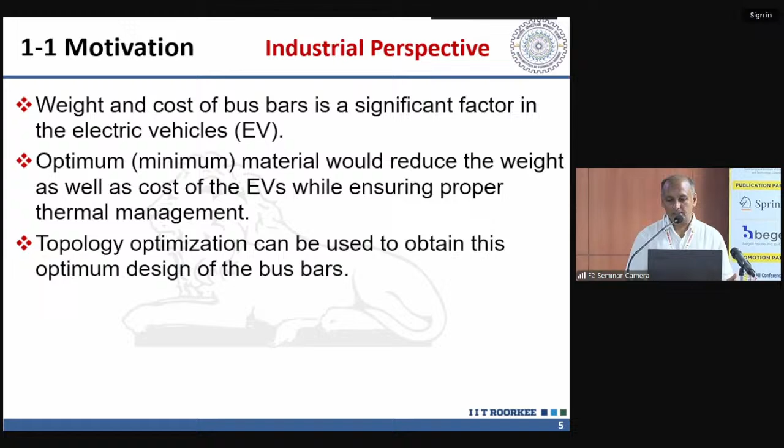So just a brief overview of what is topology optimization. It's essentially a procedure to optimize the distribution of material to achieve the best result, satisfying the physical constraints based on the physics of the problem.

This topology optimization is used in many engineering fields, though the context would be different. For instance, in the structural context, we would like a stiff and strong structural element - there the physics would be deformation. Similarly, in our context, it is thermoelectric effect. Similarly, if you've got a heat sink device, there it will be fluid flow and heat transfer. So that will be the physics involved, which will dictate our optimization process.

Topology optimization originated long back - if you go to theoretical beginnings, it originated sometime in the beginning of the 20th century. But the formal topology optimization processes became popular only after computer-aided design applications became dominant in the 1980s. Now it has been extended to a variety of applications, including structural, heat transfer, electromagnetics, and so on, with research on different optimization approaches and techniques to improve the process.

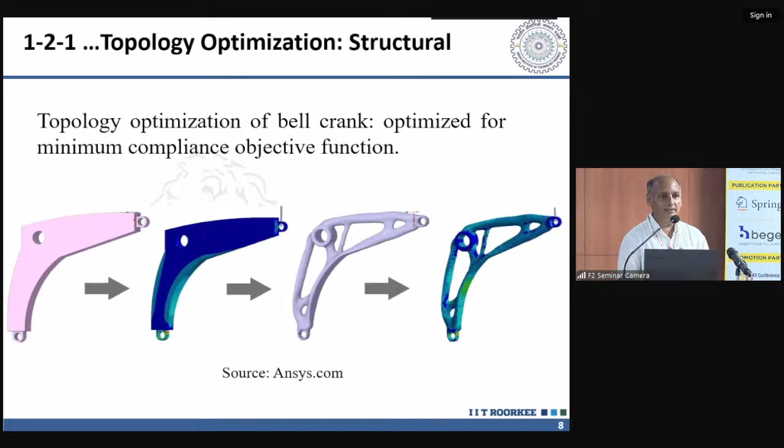So designs could vary. That's why I told you earlier that nowadays alloy wheels have very crazy designs, and they all satisfy the strength requirements. Depending on the designer and the car company, we get different designs of the wheels.

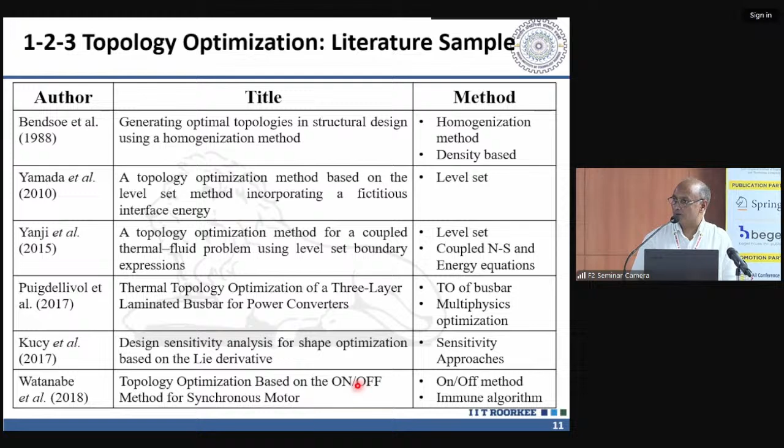They used a specific approach called Lie derivative to perform the optimization process. Other processes suggested are based on on-off methods, again for synchronous AC motors. People have also tried it for design of magnetic cores for wireless power transfer devices, weight formulation optimization, heat sink design of the rotor, placement of the permanent magnet in a rotor, and applications to composite materials and bionic applications. The last one is again a structural application, but based on a slightly different method.

Now I'll come back to our objectives. Our objective was very simple: develop a topology optimization framework for the optimal material distribution for a DC bus bar. The mandate given to us was that it must not be based on commercial software, so we had to develop all required components ourselves, including the physics solver, the topology optimization solver module, and a graphical user interface wherein the initial geometry modeling can be done, analysis results could be seen, and the final result visualized.

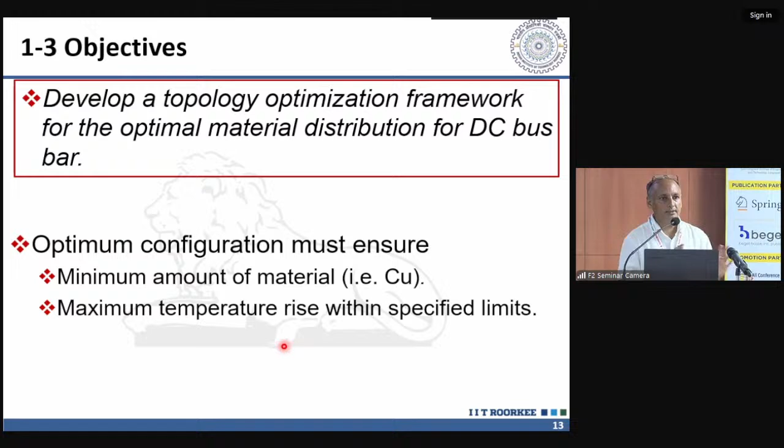With these objectives, we started our development. PhD students first developed a finite element solver, and I developed a finite volume solver. So we now have two different sets: one based on the finite volume approach, the other based on the finite element approach.

We tried two different approaches. To start with, we put a heuristic material minimization approach based on temperature distribution and current density in the bus bar. Later on, we incorporated a formal topology optimization approach based on sensitivity analysis and the method of moving asymptotes.

For physics simulation, we developed two distinct modules: one based on the finite volume method and one based on the finite element method. Today I'll be giving some results based on both of these.

A normal application would run on only one core, while a workstation would typically come with 24 or 32 cores. So our task was to parallelize it so we can utilize all the cores, and the designer can get results very quickly using all the parallel cores. Keeping that in mind, we developed our finite volume solver, and similarly the finite element solver is based on a similar approach.

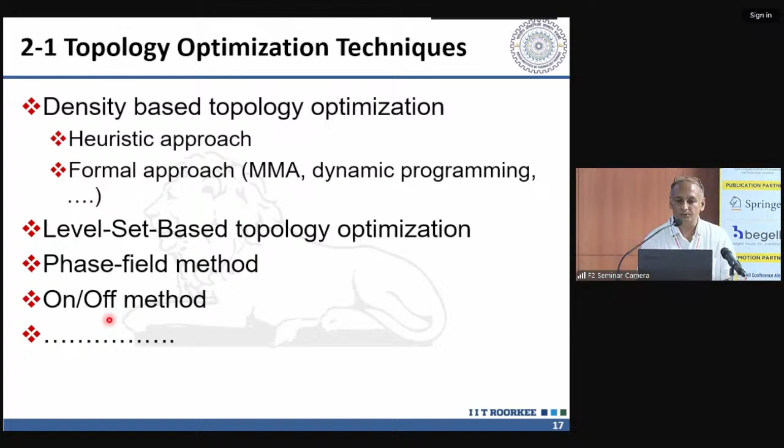We have used exclusively the density-based approach in our designs. Now, a brief overview of the governing equations which we took.

Our focus to begin with was a simple planar bus bar. We had two sets of problems, the first being the DC side. On the DC side, we use planar simple bus bars of specified thickness, because in industry copper sheets come in pre-defined thicknesses like 3 mm, 5 mm, and so on. Our focus was not on thickness optimization, as that would make the problem too complicated from a manufacturing perspective. So we take standardized thickness sheets of copper, which should also be reasonably thick to ensure stiffness or strength properties.

We took a design wherein both sides are open. There's no forcing here, so it loses heat via natural convection to the ambient enclosure at T infinity. This was an arbitrary domain, but in our application we took a simple rectangle. In topology optimization, we essentially always start with a rectangular box, and the final design comes out of that. But a general problem could have different boundary conditions, Neumann or Dirichlet.

Here the superscript V represents the electrical problem, the voltages, and T represents the temperature. So in the same geometry, I've tried to put boundary conditions for both of them. And this is our model.

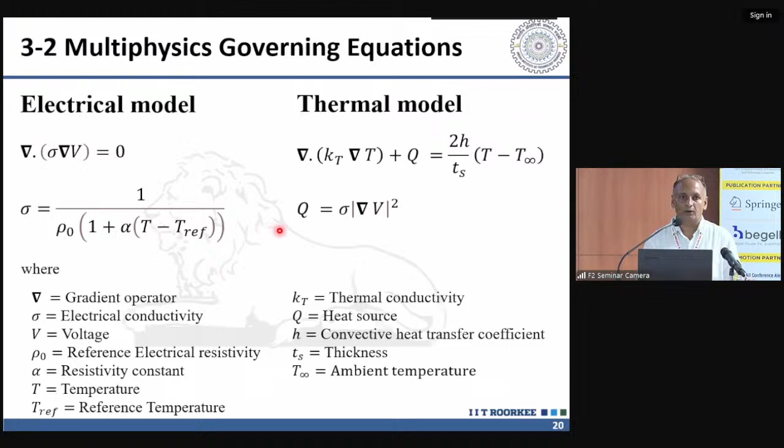On the thermal side, we simply did a thermal equilibrium, giving something similar to a Poisson problem. These two problems must be solved in a coupled fashion by our multiphysics solver, which we combined into a generic equation for developing modular code. It can be called with the listed parameters, first for the electrical problem, then for the thermal problem, solving them iteratively until convergence.

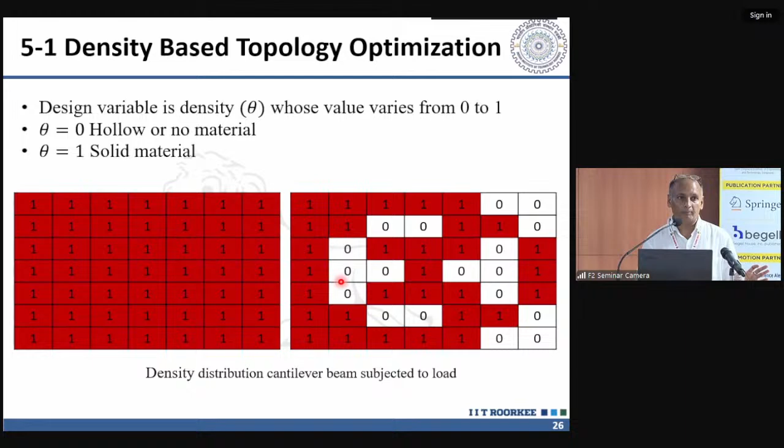For the optimization approach, we used a simple density based approach, where 1 represents material and 0 represents hollow. But in numerical implementation we can't go with 0 directly — 1 is okay, but 0 could create problems, so we modify that.

The material properties are written in terms of this density theta, our artificial density introduced earlier, using a penalization approach. Theta takes the value theta-min instead of 0, let's say 10 to the power minus 3 or minus 4, representing 0 to avoid numerical problems.

The general form of the optimization problem is to find theta. Our objective function becomes f(theta), and in our case we use thermal compliance, similar to structural compliance, subject to constraints — our physics problems, boundary conditions, and temperature limits.

So this is a formal approach that finds theta. Theta would be for all the elements or all the volumes, and the other problems like subject to the thermal problem, electrical problem, maximum temperature condition, and the new design should lead to lower volume than what we started off with. And theta lies between theta min and 1.

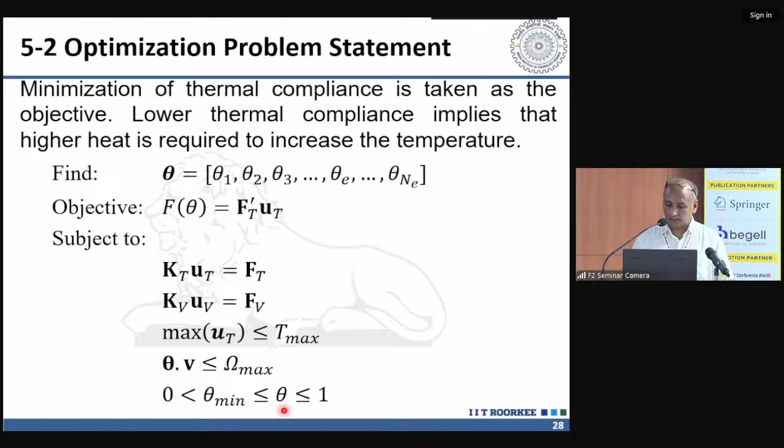If not, then we'll go to the cells which are in a cooler region and not contributing significantly to the conduction process, and that decision will be based on the current density in those elements. If the current density is very small, that would lead to lower Joule heating, so those are the elements which could be eliminated. Their density could be set to theta minimum.

And we've also got to be careful that we shouldn't do this in a way that creates a disjoint path, so that has also got to be taken care of. We should have a continuous material distribution, so that's also ensured in this process. Reduce them, ensure the continuity of the current flow, and then go to the next optimization, until we reach convergence.

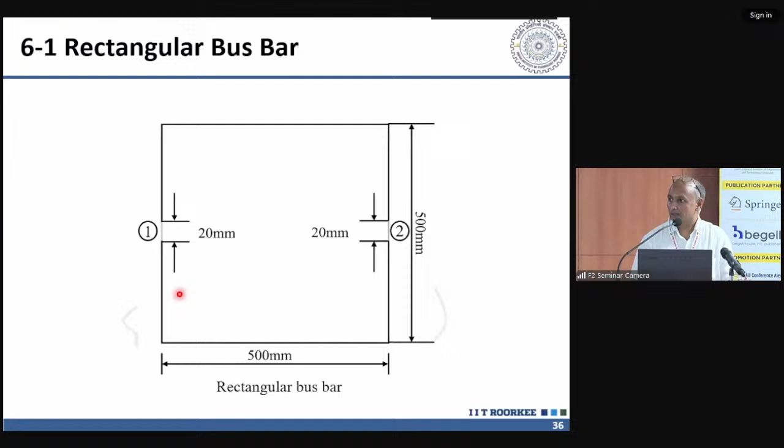Okay, I'll come to the optimization examples. We first started with a simple rectangular bus bar with two ports, one input port and a ground port, with 500 mm square. And these were the reference properties of resistivity and thermal conductivity, which we assumed to be constant.

For copper, in our range of interest, that's 273 Kelvin to 373 Kelvin, the conductivity of copper remains more or less constant. So for our thermal problem, we have assumed constant thermal conductivity. For the current density input, we took a few different options available, and similarly we also varied the convective transfer coefficient.

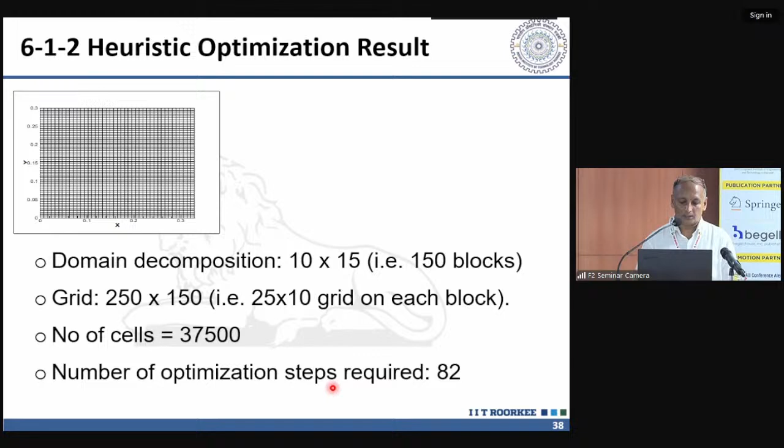For the heuristic approach, we have taken a simple structured grid of cell-centered finite volumes, with 37,500 cells used. This is the result after 82 steps. So though significant reduction is taking place from that earlier initial geometry of 500 by 500 square, we're still not satisfied with the temperature.

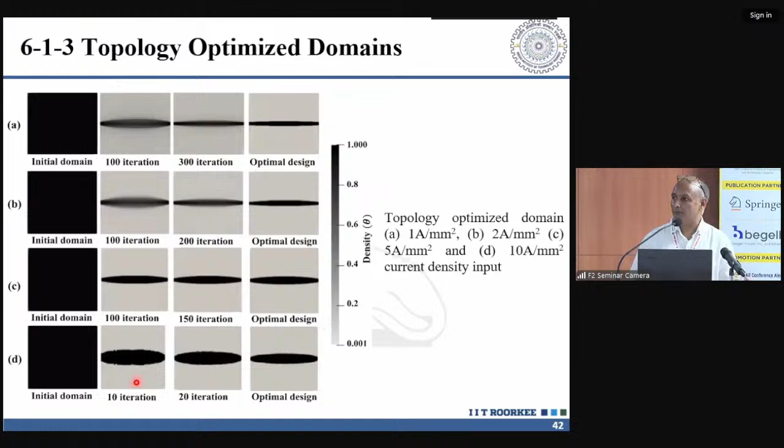So then we moved on to the formal approach, and we first performed a grid independence test to see what would be the minimum area obtained with different numbers of elements for a given current density input. These are the results for different current densities. As we vary the current density, we see that the material requirement keeps on increasing. So starting with this black box domain of 500 by 500 mm, we get an optimal design for this simple bus bar.

Similarly, I'll skip these slides, we also took an L-shaped part with three ports, one input port and two output ports. And for this too, for different current densities, we obtained optimal designs starting with a simple rectangular or L-shaped domain.

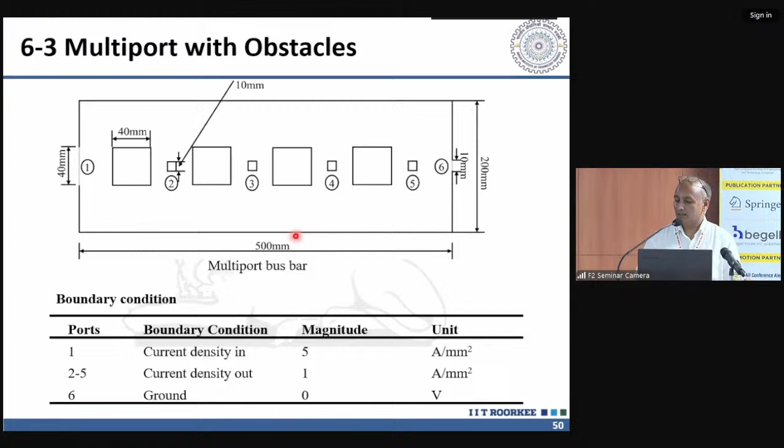And then we took a multi-port design, with different connectors in the middle here. For this also, we performed our topology optimization with different current densities. This was our final optimized domain.

And what we observed is that we can reduce more than 50% of material by using a formal optimization procedure. Material requirement increases with an increase in current density input, which is just given—we all know that when we increase the current density, we need more material, more copper. We also saw that the physics is not violated, because looking at the way the designs are obtained, the current always appears to be taking the shortest possible path. So physically, our optimal designs appear to be sound.

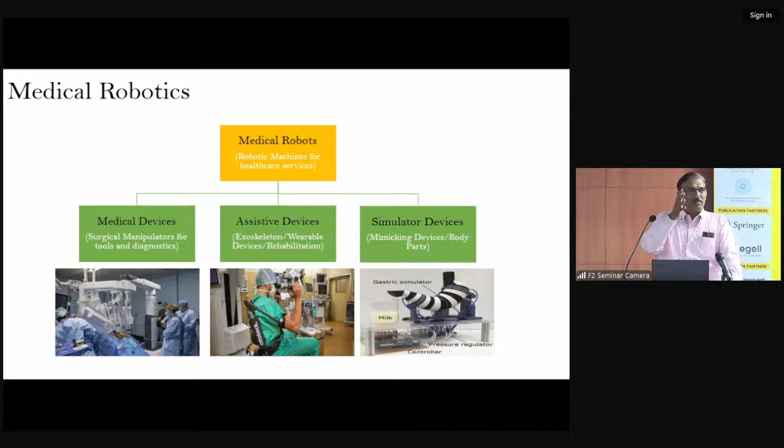For example, if a doctor is cleaning, he repeats this operation maybe 100 times for a patient. That puts a huge fatigue, which affects his muscular system. Over a period of time, many good doctors start avoiding doing surgery, but their wisdom also goes away because of the fatigue. So here is an area, assistive devices, which we are trying to focus on.

So when we talk about manual procedures and robotic procedures, hand-eye coordination is extremely important when you do manual work. It's like driving a car. Many a times we don't even realize we drive a car at 100 kilometers per hour. If you want to sweep, it takes a fraction of a second. We do it so fast, our eye keeps scrolling very fast, we don't even realize it. But when we do an operation, it's also very difficult. So hand-eye coordination is very important.

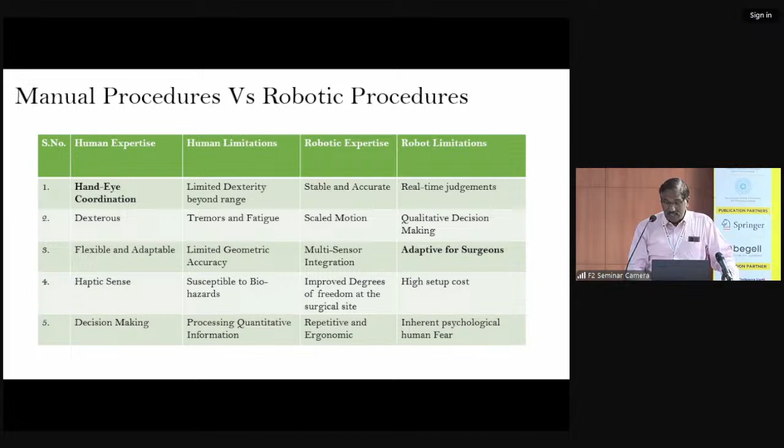Then haptic sensing and decision making - these are all the human expertise which are there. The human limitations I have drafted. Then the robotics, what it can do, and the inherent robot limitations I have done as well.

When we start looking into design and control procedures of surgeries, you see it can fall into any of these categories. So you have a master console, you can stand behind it, and you have a joystick to operate. When you use a joystick to operate, you need a haptic sensor. There are three-axis haptic sensors, not many are available, and they're not very high responsibility devices.

So you can have a master and a slave console, and people are now using it in a big way. These are some designs of conventional master control systems you have. So you have two robots, and a doctor standing there who tries to teach the robots what will be the movement. Accordingly, it's a teach-learn technique or a teach-learn pendant, which is very common in industrial robotics. But in the medical field, it is very difficult.

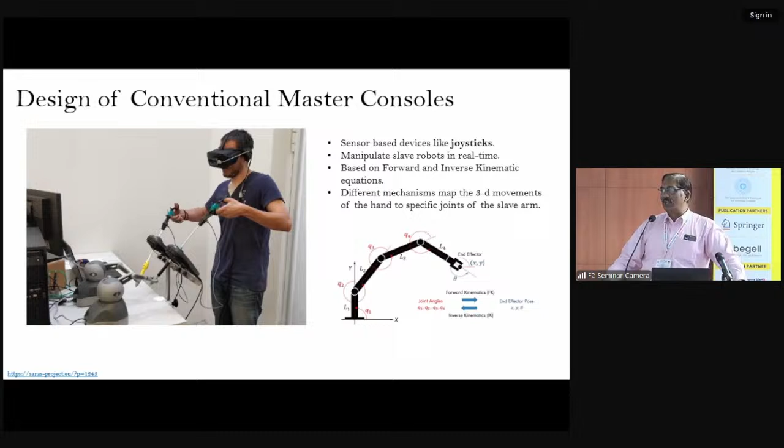Why is it difficult? Because there is a limitation on the resolutions, right? The encoders, the sensors are a limitation. So the design for a conventional master console is to have a sensor-based device like a joystick. Then it manipulates the slave robot in real time based on forward and inverse kinematic equations. It works, and different mechanisms for mapping are also carried out.

But what are the limitations? It has a limitation on the haptic feedback. See, when you get into an operation, or if a doctor cleans your skin, you only shout. After your shout, the doctor gets the audio sensor feedback and then he reduces the pressure. That's how it works. But when you are doing many operations, haptic feedback is very important, and there is a limitation for it.

Then the next issue is it's too complex to express as a mathematical equation so that 100% robotics can be done. Then it is teleoperated, which is convenient at one point, but at the cost of margin of errors. Telemedicine is good, teleoperations are good, but there is a small after effect to it. So it has a higher operating time compared with conventional surgeries, and it needs really, really high skills for that.

So now comes the domain of cobot. Cobot is where I try to teach it and then execute the same. So now it's not a moving robot, it's a stationary robot in which the doctor teaches by keeping your hand on the patient's hand and starts learning it. So it's within a confined space, but the robot cannot work entirely on its own, or it may, but it's predominantly operated by the doctor. So here we are not 100% conventional, we are not 100% robotics, we get into an intermediate domain and then we start doing it.

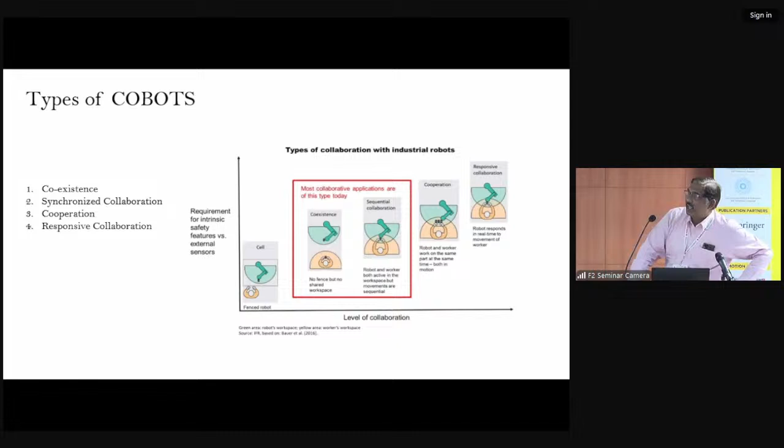So cobot is something which shares space, and a lot of things are coming into this domain. If you look at the level of collaboration and the requirement of intrinsic safety and other things, we are falling in the center domain. Most collaborative applications are of this type. You can see they are coexistent, and you can also have sequential operations, whatever it is.

So when we talk about dentistry, it's a very interesting field.

So here in dentistry, every small thing is very interesting. Suppose you want to take a photo of your teeth. X-ray is one domain, X-ray is okay for a crack analysis. Suppose you want to see a growth or something feeding on the other. But if you just wanted to see an X-ray of your mouth to find out where the decays start...

The challenge number one is you have saliva. When light hits the saliva, it reflects, so the image you get is not correct. Second thing, no teeth are in a fixed domain and it's not flat, it's curved, and there is a light limitation.

The camera has to take a photo where there is saliva around, and the pH of the saliva plays an important role in the reflectivity. It has to take images, and it's not necessary taking images only on the front, you have to take images at the back also. So look at it, it's only one part of the start story.

To assess your health, how do we use it? So here is where cobots can come into existence, and the other thing is today everybody is very much worried about oral hygiene. So the doctor has an arm which he pushes into your mouth. There is a camera there, and he tries to video record it or rotate it and take a photo. So when you do so, you try to assess the patient instantaneously and immediately.

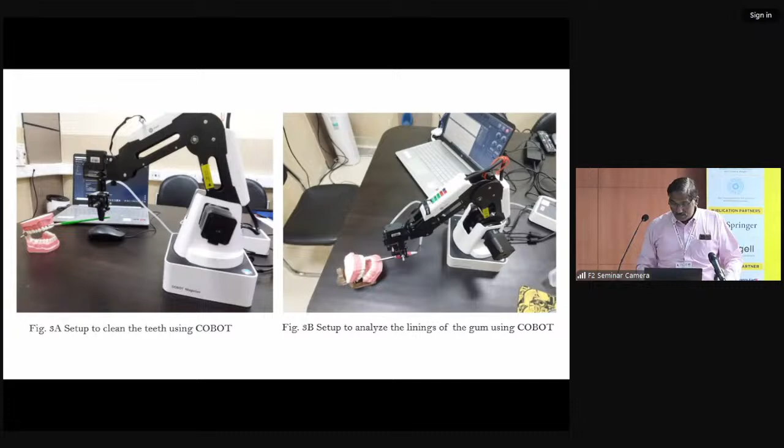So this is one part of the story. We developed a lot of fixtures for how to keep the camera, and then we developed artificial saliva, coated it on top, multiple layers of coating, with an online camera that sees the denture of the patient, and based on that visual...

So this is what we developed, and we are trying to look into it. Whatever video comes, we convert it into a photo or an image for understanding.

The other thing we wanted to do, which we are also trying along with the cobot: currently when you go meet a doctor, he says measure temperature, measure pressure, weight, and then a paramedic prepares the file for the doctor.

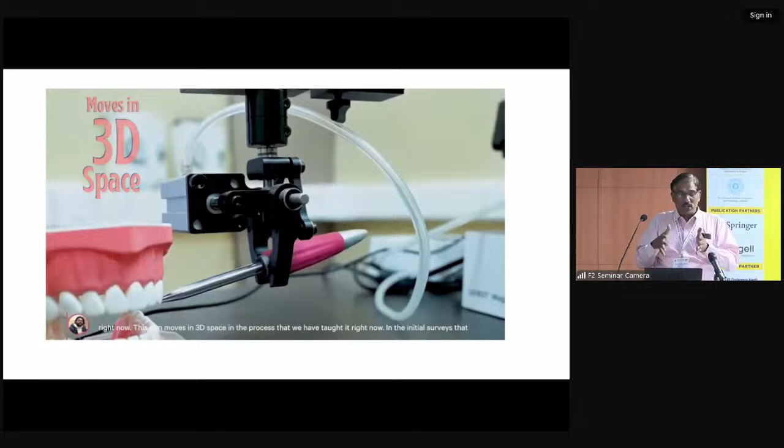A similar thing we wanted to do for dentistry. As soon as you go to a dentist, there will be a system to take a photo of your teeth and other things. So before you go to the doctor, your file goes to him and he assesses what is there in your teeth or jaw, so he can start working or looking into it. For that, we are trying to develop a standard system where these cameras can be used. This is one thing we tried doing.

For learning, we looked into operating time, specific procedure, console, docking time, stepping time, all these things. We also established the length of stay metrics, LOS, for it. This is one thing we developed.

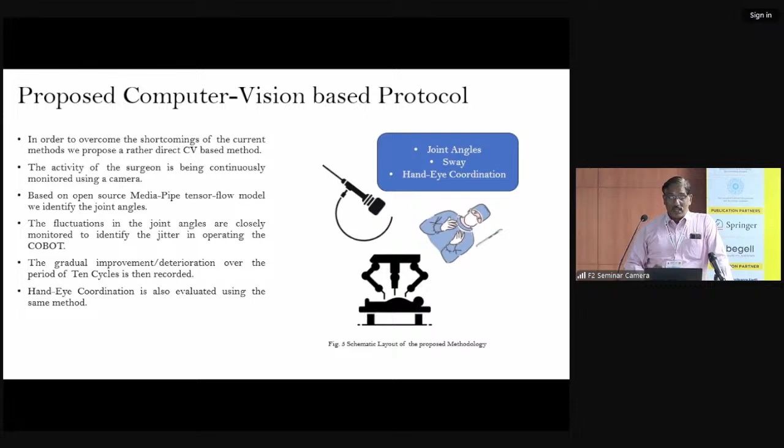So we are trying to see everything with the doctors. For the doctor, we will be able to do this.

Next, what we did was we wanted to reduce the fatigue of a doctor. So we tried to develop a device where, knowing the angle the doctor keeps his hands, we converted it into links. From these links, we developed an assistive stand where the stand height will be adjusted, so the doctor rests there properly and only moves his end effector, rather than moving this and that.

As soon as he settles down, if there is a patient here, the doctor will always sit down and try to work. But many times he does not get access to the face and teeth properly, so he stands and does it, and ends up in a skewed position.

So now what we are trying to come up with, we put the robot behind. The robot stands here, whatever it is, the gripper comes here, and the doctor will always try to have it in front of him and start doing it. So he will be stationary, and the cobot will take all the skewness. That's what we are trying to do.

We have understood the gripper, developed a small device, and applied for a patent for it. We are working very closely with KGMC. These are the novel procedure metrics which we are using for measuring the learning curve: hand tremors versus time, hand movement versus time, eye coordination versus time, and space utilization versus time. This is a matrix we are planning to develop - it does not exist, so we are planning to develop it in this domain.

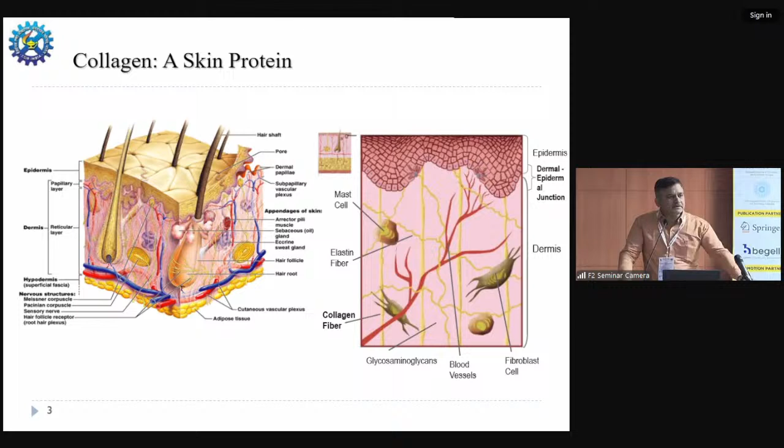I wanted to introduce the skin. Just now, Dr. Ramkumar talked about the skin, the cancer effect, all those things. So for making leather, the skin is the fundamental raw material, and it is a protein. There is a key protein present in the skin, known as collagen. The structure of collagen is very complicated, and it was discovered by our own Indian scientist, G.N. Ramachandran, in 1954. Just a few months before, the structure of DNA was solved, so he just missed the Nobel Prize by a few months. Many people may not be aware of it, but as an Indian, we must know about it. That is the reason I make this point important at every conference. When I get any opportunity, I try to share it. This man really deserved the Nobel Prize, but things happen. In 1954, within a few months, he missed it.

This collagen protein present in the skin is a very nice nanomaterial. It has about 300 nanometer length and about 1.5 nanometer width, and it has a triple helical structure. If you look at the architecture, you have the single collagen molecule, which assembles parallelly, linearly, and longitudinally. Then it forms a micro or pentafibrillar structure, various microfibril fibers and fiber bundles, and finally a macromolecular skin structure which is completely randomly arranged. It is not properly arranged at the macromolecular structure, but if you go into the individual fiber bundle and look at the fiber, you will understand that it is a very nice homogeneous structure at the molecular level.

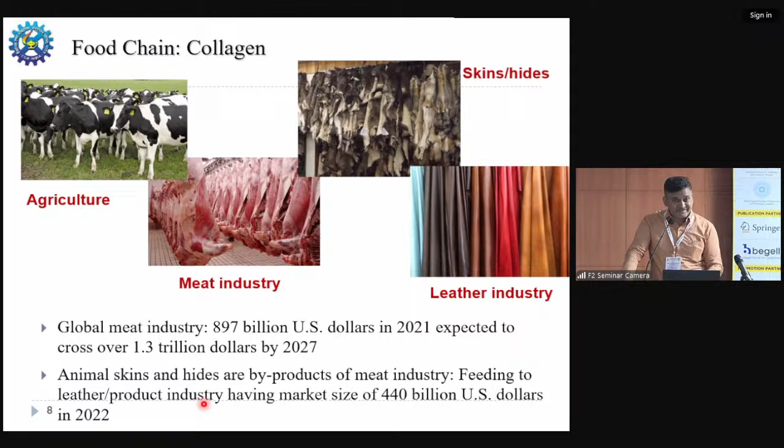In terms of leather processing or tannery, located in various environments globally, it involves a lot of chemicals and water, but unfortunately leads to a lot of liquid waste and solid waste. For every ton of skin or hide processed, it generates about 600 to 700 kilograms of solid waste - that's a major problem. Interestingly, it has a lot of protein, that is collagen, so there is great economic potential being wasted.

If you look at the different types of such waste, it contains metal-containing collagen waste, which is chromium, normally used to make skin into leather, a process known as tanning. So you have both chromium-containing waste as well as chromium-free waste. There are waste types like trimmings and cuttings. There are certain current applications, though majority are low value - they extract glue or gelatin, or in some cases make it into leather board and use it as inserts in shoes, etc.

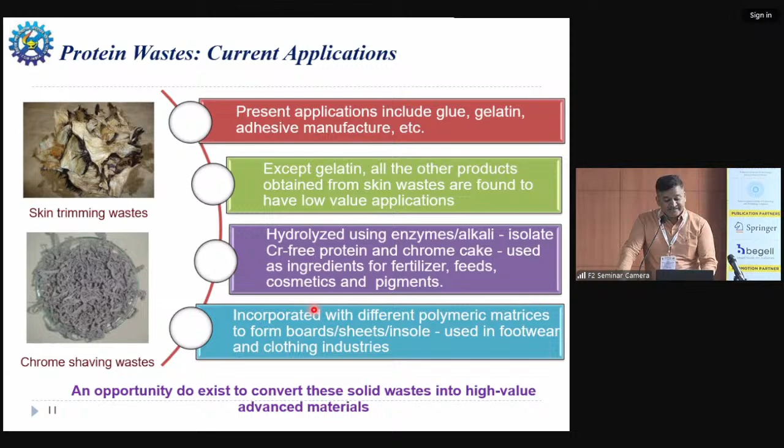So there is an opportunity to make high value advanced materials out of this waste. What we have done is use these protein wastes to develop nanomaterials, composites, or even biomaterials for biomedical applications. Today I'm not going to talk about biomaterial applications for biomedical use. Rather, I have chosen to look only at developing nanomaterials and composites for energy, environmental, and lifestyle product applications.

In this example, what we have done is take the collagen waste without any chromium, and convert it into self-doped nanocarbon materials for sustainable energy applications. We take the skin, remove unwanted material like hair and flesh, and subject it to high temperature treatment starting from 500 to 1000 degrees Celsius in the absence of oxygen. This allows us to convert it into nice nanocarbon materials.

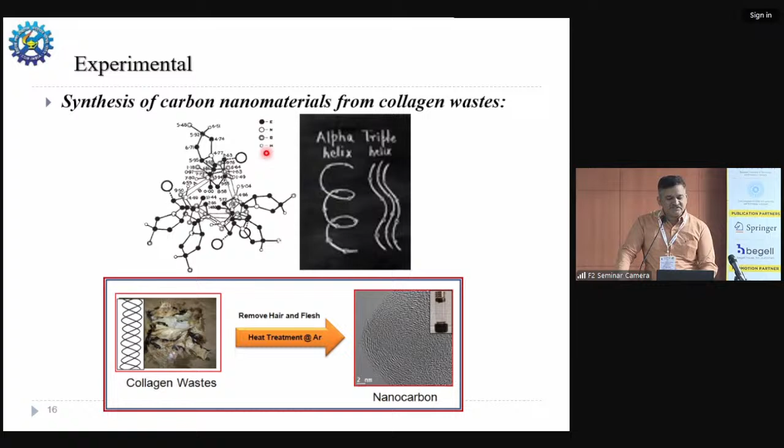The beauty of this raw material is that in the skeleton, it has carbon as well as nitrogen and oxygen. Some people take carbon nanotubes or graphene, and since it's a purely carbon-based system, they try to enhance electrical conductivity by doping with nitrogen. But here is a material which already has nitrogen in it, so we are looking at the effect of that, how you can achieve better carbon materials. So the results are here.

When we look at the amount of oxygen and nitrogen, we see oxygen increasing as temperature increases, whereas nitrogen decreases at high temperature. But still, there is about 3% nitrogen available even in carbon prepared at 1000 degrees Celsius. These are the typical data related to Raman and XRD - we can see the typical D and G bands in Raman spectroscopy, and the XRD shows the typical 002 and 101 diffraction peaks of the crystalline graphitic carbon material.

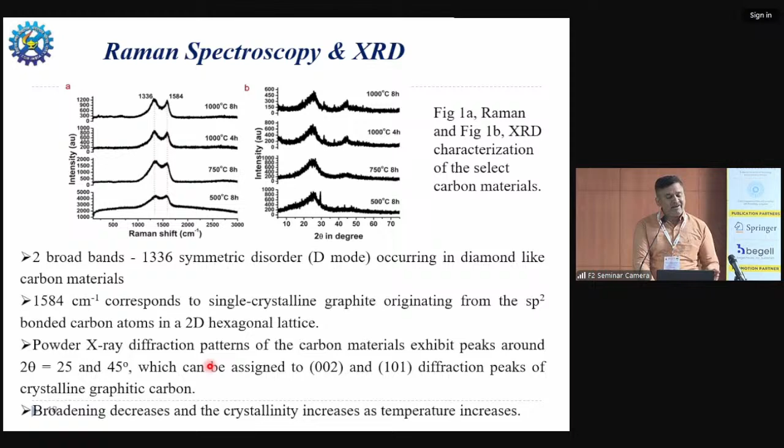We also did X-ray photoelectron spectroscopy, where we have seen that the edge nitrogen is vanishing as the temperature is going up, and the internal nitrogen, which is substituting the inner carbon atoms, is increasing at high temperature. So the pyridinic nitrogen, which is on the edge, could be converted into nitrogen gas at high temperature. That is our prediction.

These are the transmission electron microscopic pictures, which show the carbon nano onion kind of structure, where the typical size is about 20 nanometer onions, with an interlayer spacing of about 3.363 Angstrom, which is slightly higher than the typical interlayer distance observed for a graphitic structure, about 3.354 Angstrom. This increase in interlayer spacing is primarily because of the effects owing to the presence of nitrogen and oxygen atoms, which we just discussed.

If we try to look at the properties, it has very good conductivity, specifically when the temperature is very high, and we got very good electrical conductivity. It also has very nice photoluminescence behavior, and it has a magnetic behavior, which could be primarily due to certain impurities. That is what we found.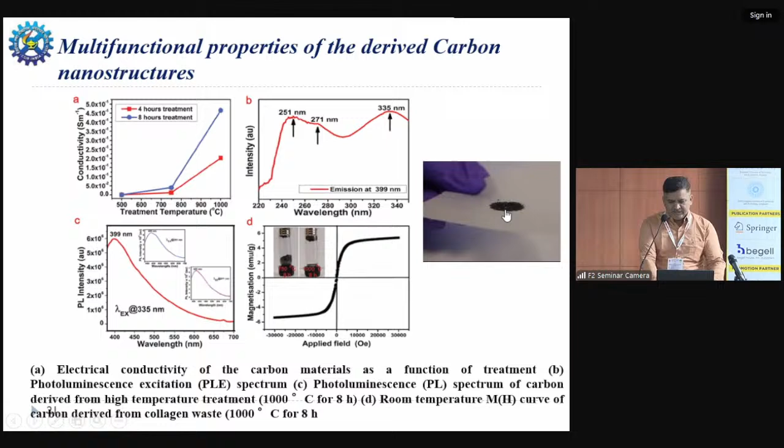So I don't know whether this video will play. Okay.

We also tried to use this for lithium battery applications, where we used this carbon as an anode material, and we observed very good cycling capacity, even up to 50 or 60 cycles.

This is another example where we tried to use chromium containing carbon waste and subjected it to a similar kind of approach. Here we found that at high temperatures, the chromium is converted into chromium oxide at 500 to 750 degrees. But the moment you go to 1000 degrees Celsius, the chromium oxide is further converted into chromium. That is what we observed in the XRD.

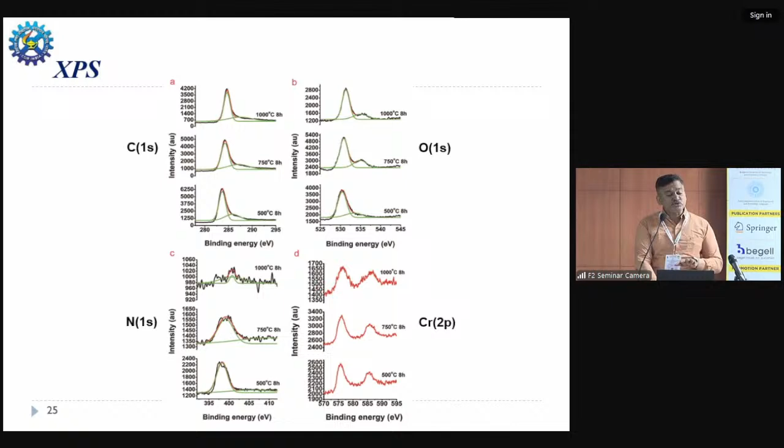The XPS analysis shows that the chromium is present in the 3+ form. Chromium at hexavalency is toxic, but we are making sure that there is no oxygen, therefore it is not oxidized, and this is proven through the XPS.

This is the typical structure formed, where you have the chromium nanoparticle around 40 nanometers surrounded by carbon layers, and the interlayer spacing is also shown here.

Here again, we got very good electrical conductivity for the materials, and the magnetic properties are fairly higher, almost 6 EMU per gram we obtained, primarily because it is not just impurities, even the chromium contributes to certain magnetism. Therefore, compared to the previous material, here we got fairly higher magnetic behavior.

We tried to use this for two applications. One for organic reaction catalysis, where we tried to do aza-Michael addition reactions and used this material as a catalyst, and we found increased yield with reduced time for the reactions to happen.

We also used this for EMI shielding applications, and we show very good shielding efficiency for these materials, where the total shielding efficiency's absorption coefficient is more compared to the reflection.

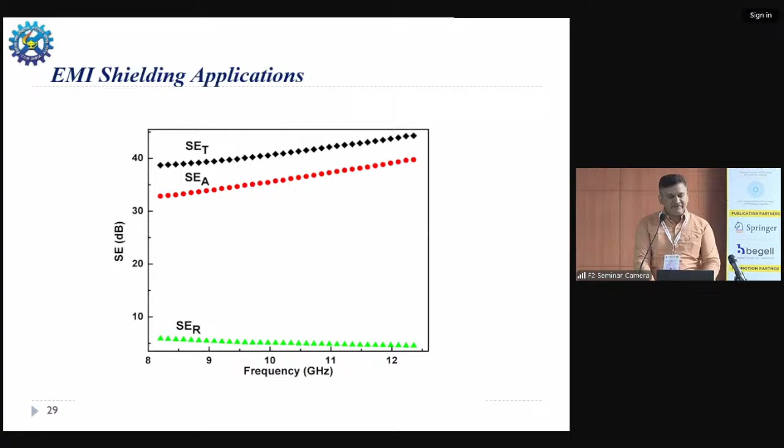In this example, we tried to do the same reaction at a specific temperature, say 750 degrees Celsius for about 7 to 8 hours, and we found that we are able to incorporate more nitrogen, close to about 7.5%, and we are able to form very nice onion structures.

We tried to use this for oxygen reduction reaction, and we observed outstanding overall electrocatalytic activity with good properties like high current density, superior methanol crossover immunity, and better durability compared to the benchmark platinum carbon catalyst.

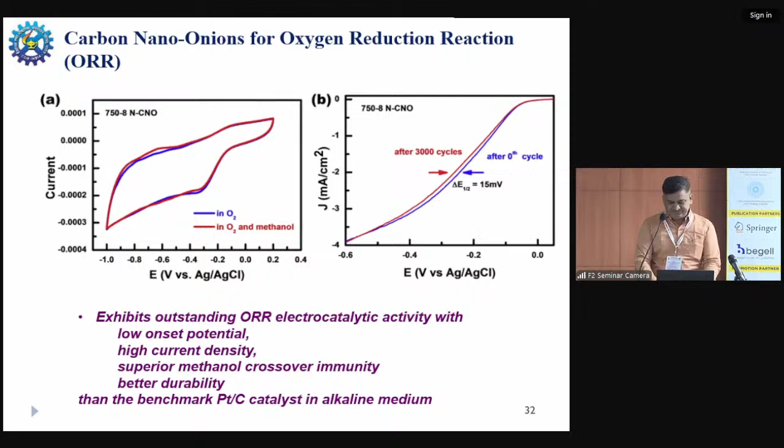In this example, what we tried to do is treat simple iron chloride with collagen and then subject it to high temperature treatment.

We tried to transform the initial material, which is highly insulating and paramagnetic because of the iron chloride. When we subject it to high temperature, we were able to convert it to a perfectly conducting and highly ferromagnetic bifunctional material, where the iron particles are surrounded by carbon or graphene layers.

We tried to use this for two applications: one for environmental remediation, where we can see that dyes are very nicely removed within a period of about 1 hour or so. These materials can also be used for lithium ion battery applications as an anode, and that is what's shown here.

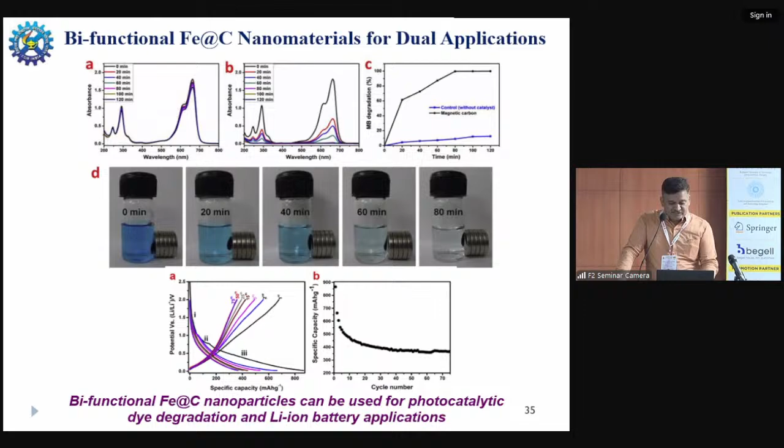So this is an example where we tried to convert this collagen waste into a porous spongy material, which is again highly magnetic. We used the super paramagnetic iron oxide nanoparticle, treated it with the collagen, and subjected it to freeze drying technique. We are able to convert it into a very nice spongy material.

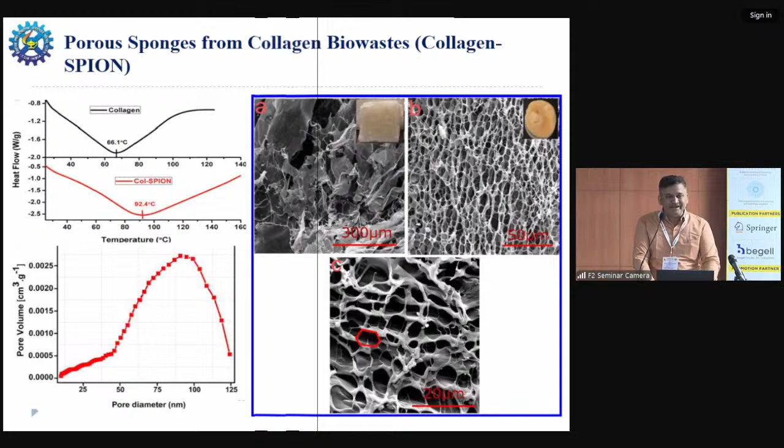The sponge has very nice porosity, and therefore very good enhanced thermal stability and enhanced porosity. Potentially this can be used for environmental remediation applications as well as biological or biomedical applications. We demonstrated biocompatibility using certain cell lines, and the cells are growing very nicely without any problem, showing it has potential for biomedical applications.

And the same material can be used for even environmental remediation applications, where one can try to use it to remove the oil and also remove the dyes.

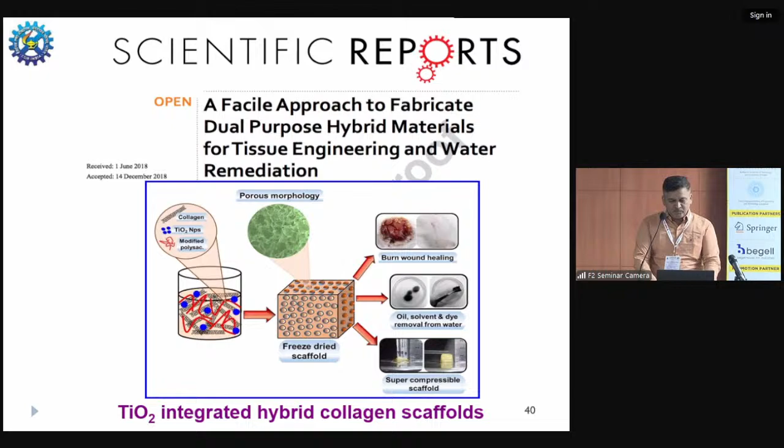In this example, we try to show incorporating the titanium nanoparticle and then developing a kind of dual purpose hybrid material for both environmental and biomedical applications. We initially prepare the titanium nanoparticles, which are anatase structure, incorporate them into the collagen, and develop the spongy material.

We try to show that this can be used as a scaffold for burn wound healing applications, where we can see that at the end of the 21st day, our scaffold has very good closure of the wound. Even for burn wound healing, it can be applied.

And this can also be used for the removal of dye.

It has applications for both oil removal as well as dye removal, and it has a very good super compressibility behavior, where we are able to go up to hundreds of cycles without compromising the structure. So the structural stability is also good.

This is the last example where we try to use an approach wherein we mimic leather and generate leather-like materials. This is primarily because of limited raw material for the leather industry, forcing synthetic polymer chemistries to develop materials like synthetic leathers, which are primarily polyvinyl chloride or polyurethane based materials.

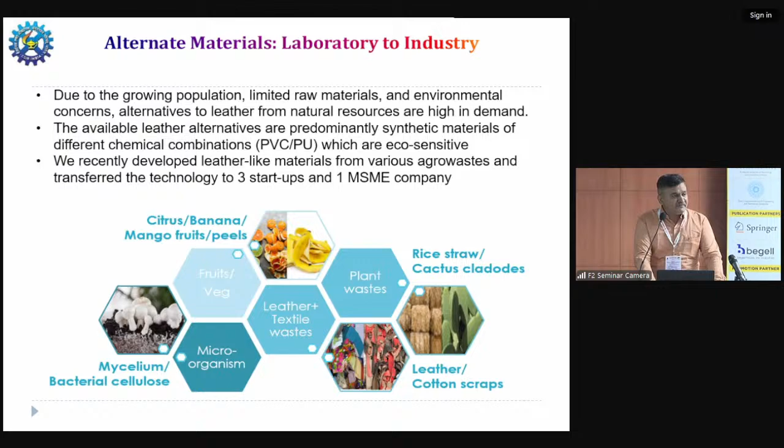We work on different verticals, and we successfully developed two major patents in this area, one primarily in fruit, where we developed mango-based leather-like material. There is an international benchmark material available from Netherlands known as Fruit Leather Rotterdam, which is already mango based. This is our own development, where we almost achieved similar properties and were able to make products out of it.

A startup company, we just transferred the technology and they already put up a plant in Gujarat. The company name is Amati Green Private Limited.

This is for the plant-based portfolio, where we try to use agro waste such as rice straw or wheat straw, where typically after agriculture the straw is burnt, leading to a lot of pollution in the air. So we try to provide a simple solution for it, using rice or wheat straw to develop leather-like materials.

And these are the products made out of these leather-like materials made from rice or wheat straw. This is again patent filed, and we successfully transferred this technology to 2 or 3 companies.

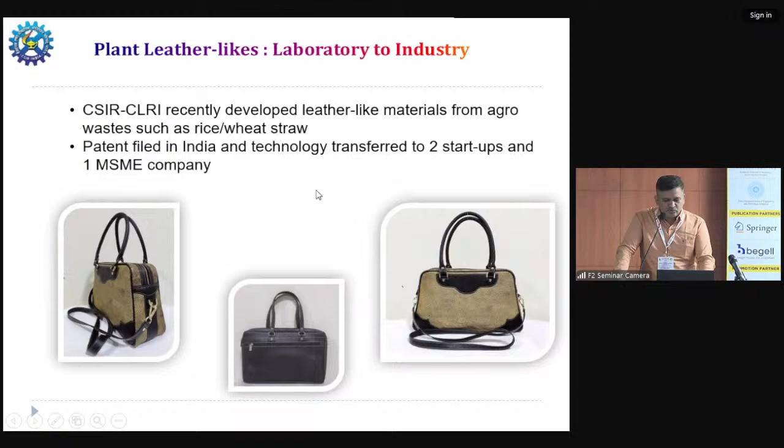I think already 30 minutes over.

I'll just conclude by saying that there are various ways to convert bio waste into useful multifunctional advanced materials. We have shown a few examples where we convert collagen into self-doped carbon nanomaterial or chromium carbon core shell materials or nitrogen-rich carbon nano-onions or bifunctional materials or magnetic sponge, etc.

We also showed examples of developing leather-like materials, and we demonstrated use of these materials for certain high-value applications like lithium-ion battery, or as a catalyst in organic reactions or environmental remediation or lifestyle products.

So we demonstrate that nanoscience can potentially be used to convert these bio wastes into some useful advanced materials. So I must acknowledge some of our students, collaborators, both in India and abroad.

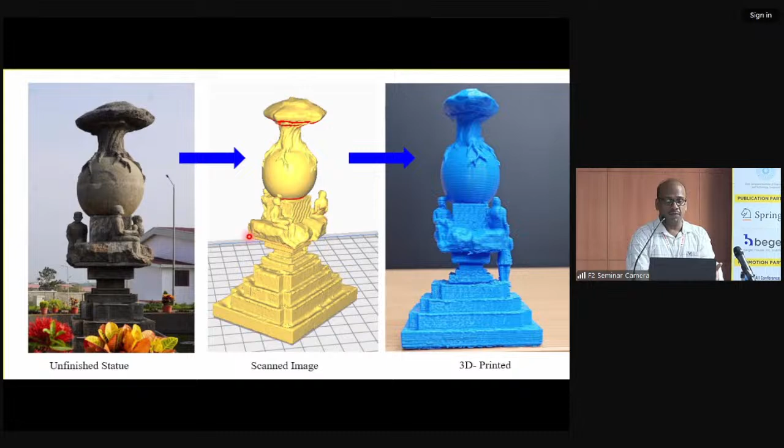To go further, when we talk about manufacturing, everyone thinks that they remove the unwanted material. That is true, that is a way we are able to make a statue and all. But it is not only that kind of thing, that is basically called subtractive manufacturing process. Along with that, additive manufacturing process also plays a major role. And for a few more things with that, formative manufacturing also. Among all 3, now additive manufacturing is getting more importance. Why, you will come to know maybe in upcoming slides.

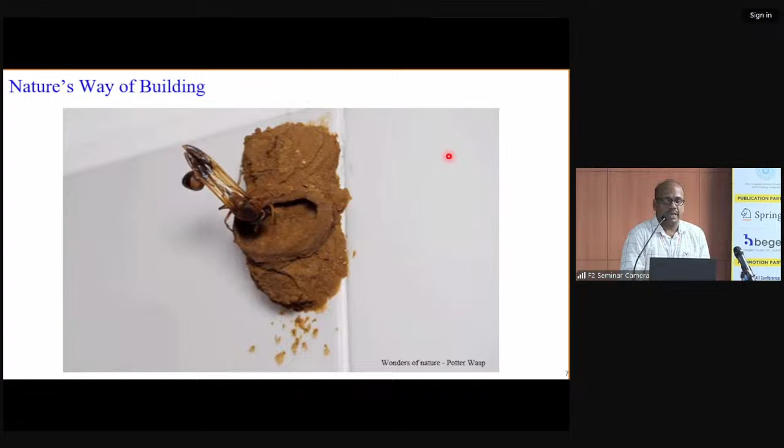So how does this additive manufacturing come to the industries to make a product. If you see this, the wasp is building its nest. What is happening really? If you see this animation very clearly, now it goes, it will bring the mud, it is in a spherical shape, placing on the brim of the previous layer, and then spreading across. See, most of the processes we inspire from nature and then develop. So this is a great example for additive manufacturing too.

If you see over here we talk about model and prototype. So we frequently come across these kinds of terminologies. Prototype, so a prototype is supposed to be made, and that also should be made in a rapid way. Only then are we able to make an actual one. For that purpose, we need a process which can make the prototypes very fast.

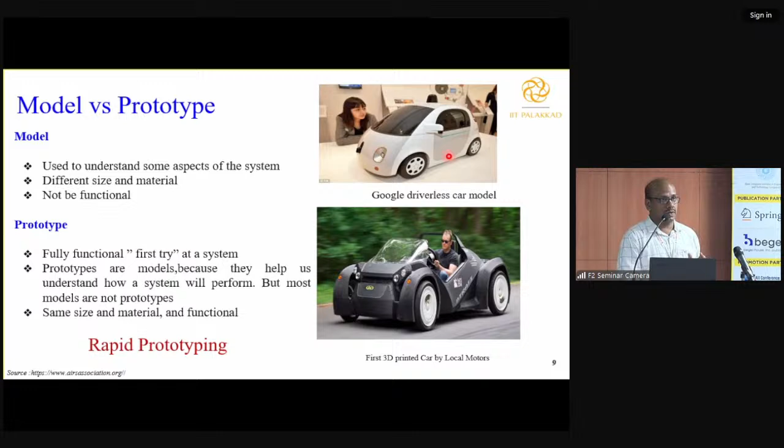That is the reason these 7 processes evolved, which we are calling right now additive manufacturing. But please remember, 20 years before, we called those processes rapid prototyping, because the prototype should be made in a rapid way.

Not only that, if you see the functionality point of view, we design the products based on the need. That is true, but there is also a constraint on manufacturing. Due to that constraint, we are unable to explore the real need or real requirement.

Apart from that, in the morning plenary session, Professor Singh mentioned topology optimization. Sir gave nicely the algorithm for how to optimize the topology. After that, that design should be made.

How to make it? See, everybody knows this is a chassis of the vehicle. The first one is made up of solid straight members because the manufacturing process didn't allow different shapes. Even though there was a requirement for different shapes based on aerodynamics, we were unable to make it. Now additive manufacturing has given a way to make such a 3D printed shape like this.

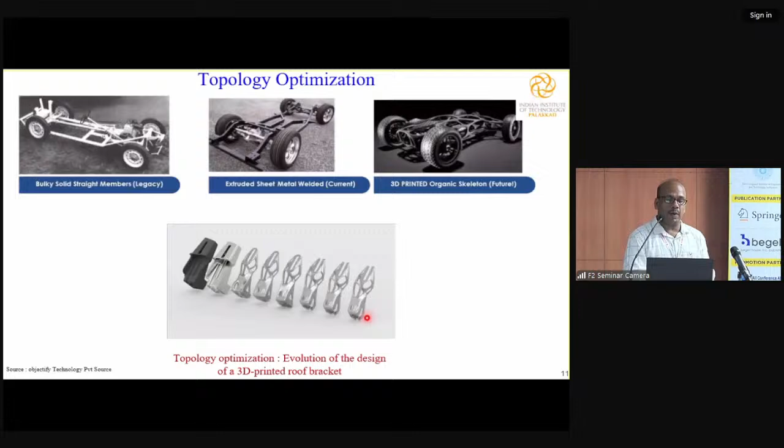The next one you see is a small bracket they are using in the roof. Initially they used a huge amount of material and the shape had a constraint. But 3D printing again gave freedom — you were able to change the material as well as play with the shape, and they reduced the amount of material as a result.

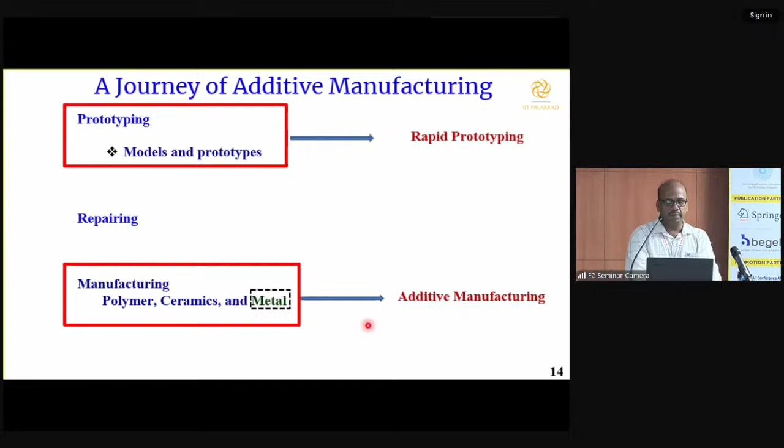Now people started to work on composites, functional gradient materials, so it started to evolve in that direction also. Ultimately now this progress is going on in the area of metal additive manufacturing. Since we are talking about future trends in manufacturing processes, I believe we need to know more about metal additive manufacturing. If you see here, there are three processes related to metal additive manufacturing.

If you see, in metal, based on the raw material, the processes are classified. If you have raw material in powder form - maybe in a previous lecture, Professor Thanigaivelan said they will make a powder, correct? They will burn it and get the powder, nano powder. Now you have a powder, from the powder also you can make a part. Only thing is, ultimately you have to get a product, a part, a shape out of it.

A powder form is a solid, and you again have to convert it to a solid. How do you convert solid to solid? You have to add binder, compress it, and get the shape. That is one way - how they make puttu in a conventional way. Now another way...

...how to make it - you just melt it, okay, get a shape out of it. Whatever shape you want, you make a cavity and do it. That is the way casting goes. But here, I don't have time to make a cavity and all. I have to control with the heat source, melt and solidify, and get the final product. That is the beauty of the process.

So based on the process, it can be classified - that means raw material I'm talking about, and then heat source, laser. The laser is such a pointed heat source, highly intense and directional, that I can control it. Now we don't have a presenter - if you see a presenter, it has a laser pointer, wherever I want I can direct it. So laser can be used for that purpose, like electron beam, electric arc, friction, plasma - it goes on.

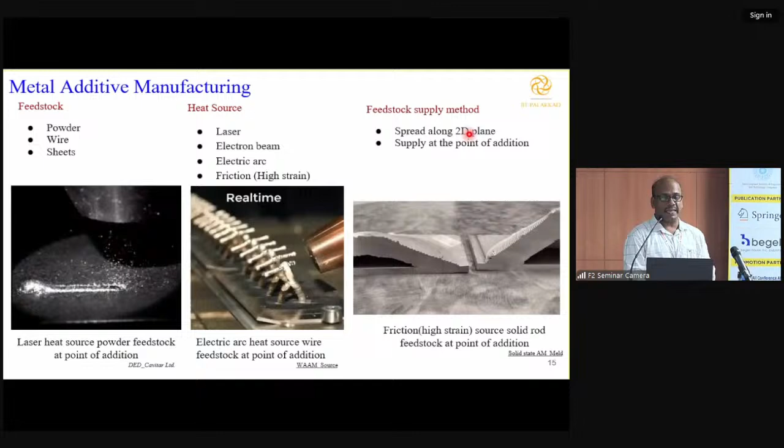And then how you are supplying the material, that is called feedstock. So these are a few examples of metal additive manufacturing processes. In this talk, I will just concentrate on laser powder bed fusion. So what does that mean? Here the process is: take a powder, spread it on the platform.

Now take a heat source, that is a laser. With the help of the laser, you start to melt the material and allow it to solidify, then you get a final product. This is the overall process. It's called powder bed fusion because you spread the powder on the bed, the platform called bed, then with the help of laser you are fusing it. That's why the process is called laser powder bed fusion.

If you see, this is the process shown over here - powder spread on the platform, heat source comes. Once spread on the platform, it should be ensured that leveling of the powder is proper. This is the way leveling is done - the roller goes in front of the powder and levels it. Spreading and leveling is taking place right now, now the laser source comes.

It started to make the product. It's a layer by layer process, additive manufacturing basically. If you have a CAD model like this, then you can make a product by this process. After that, you have to remove the powder, which are some unnecessary things. Finally, I need a product.

Since we are talking about laser powder bed fusion process, it is a layer by layer process. When I want to make a layer by layer process, I have to first make a first layer. How to make a first layer? First layer, if you want to make one track first, we say tracks, one line you have to make. If you want to make one line, how to make? First you put a dot. The dot becomes a line, becomes a layer, layers become a final product. This is the overall idea.

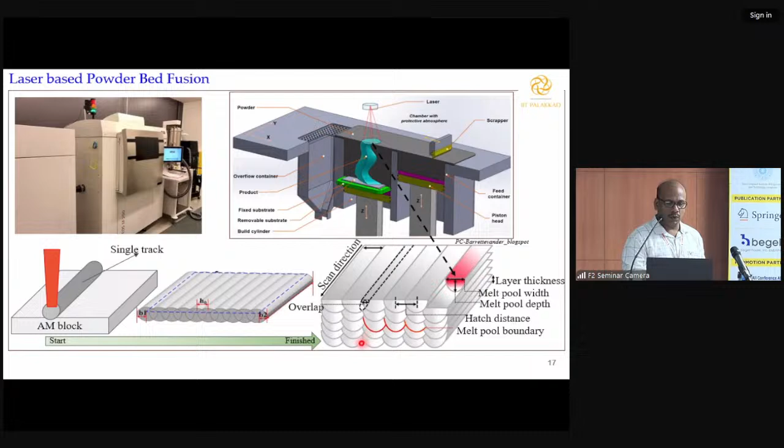This is a machine we have in IIT Palakkad. It's a metal additive manufacturing machine, laser powder bed fusion type. This is only what we discussed in the previous slide. If you see here, what is happening is that we start with a single track. One single track is over, a series of single tracks is done on the same layer. Once it is done, you go layer upon layer. This is the way the process works.

These are the process parameters generally we are using for laser powder bed fusion: laser power, scanning speed, laser spot diameter, powder size, and layer thickness. The combination of laser power and scanning speed gives laser energy density.

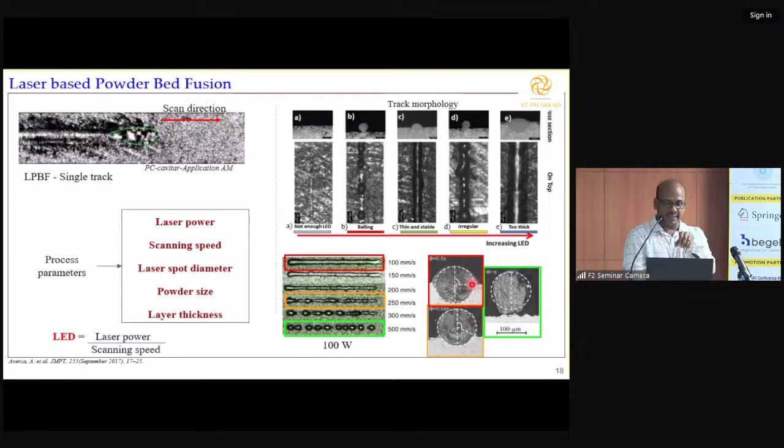Not only the dimension, I want to know how it is having a bonding with the previous layer. That should be known for me first. So if we go with high scanning speed, we are able to get only this kind of thing, which is not even having a bond with that. When we go with low scanning speed, we're able to have a proper bonding with the previous layer. That means half of the track is there in the bed, remaining half is there on top of it.

Go further. So now they understand, okay, we are able to make a single track with less defect. Good. But will it be sufficient for making a product now? That is a question that comes to mind. Generally, no. Why? It is like a layer-based process. But when you want to make a layer, you made only one track now. The one track optimization is never going to help you to make a common parameter for printing the whole product.

What should be done for that? Because when you do like that, one track is over. When you come to the next track, some other set of parameters will have an effective role. Then one layer is over, another layer you are making on top of it. That time another set of parameters will give a better result. That means whatever you have used now is not an optimized parameter for making a product or a part. Then what should be done?

Then we build a strategy for that. This is called single layer, single track. This is only what people conventionally do. That is not sufficient; only then are we able to convince the technical committee. Then we go further: the single layer and double track should be made, so optimization should be done for that also. Because in a single layer, if you want to make it, you'll deposit track adjacent to the track. That should be optimized. On top of it, you have to do a third strategy also, double layer, single track.

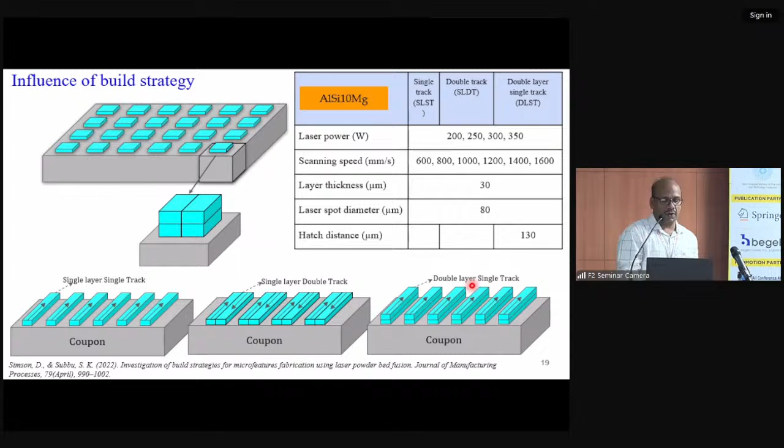That means one over another, then only we will get the point idea. If we are supposed to optimize a parameter for all these three conditions, then only we will be able to get a proper product. So that is our proposal for the work. And then we plan the experiments based on these build strategies, and we are able to make like this.

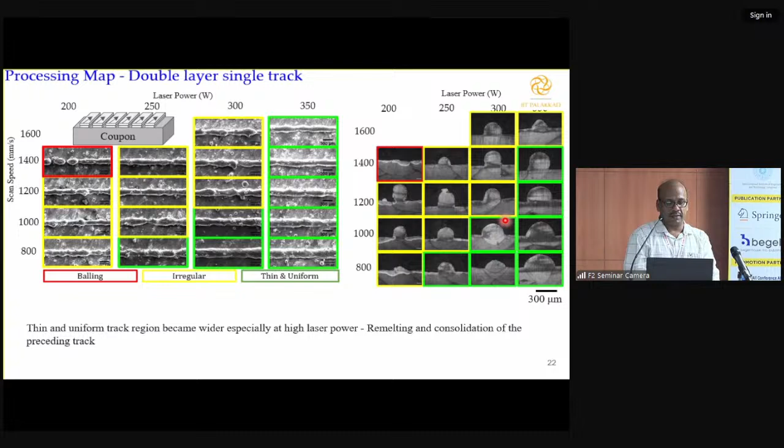Then we further continued our optimization, moved further. Single layer double track we have done. Here also we are able to find which set of parameters give a better result. Then we have to go for the other, double layer single track. There we are able to find out which set of parameters are giving a good thin and uniform track.

So now all those things we are able to find out which set of parameters are optimized for making a better part by laser powder bed fusion. And then if you see the melt pool characteristics, we have also discussed that, which is published in the paper. Maybe I can show the paper at the end, you can refer to it. There are interesting physics here, but since there is no time, I have to conclude within 5 minutes. I'll go further into that.

Then here, if you see how this laser power and scanning speed, which are the foremost parameters, when I consider track width, laser power plays a major role.

Whereas for remaining things, if I consider bead height, scanning speed plays a major role.

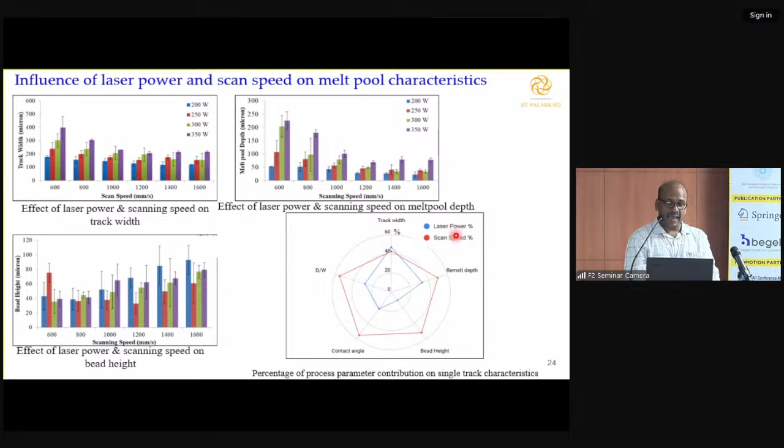So this kind of output we got from our experimental work. Finally, after applying all these three strategies, we found this set of parameters gives the best results for making the part. But this is only done for a single track.

Is it sufficient to make any complex product? Additive manufacturing is meant for making complex products. In that case, a single track is just linear. If you want to make a 3D thing, it is a combination of linear and curved paths.

So this kind of optimization should be done for a curved substrate also. When you go for different angles of curvature, you see for a 30-degree angle, more material is deposited. What could be the reason for that?

The problem is that your powder is stationary, and you are taking a laser and passing it. Whenever the laser takes a turn, it stops for a moment - it decelerates and then accelerates again. At that time, whatever laser comes, it will come - you can't stop the laser. So more energy goes in and melts the material. That's the reason, especially at the bend, you get more material deposited. So that should be optimized.

How to optimize? There are many ways. One way is you can do optimization in the laser power itself - adapting the power based on the requirement. That can be done, but for that we have to develop the machine in a different way.

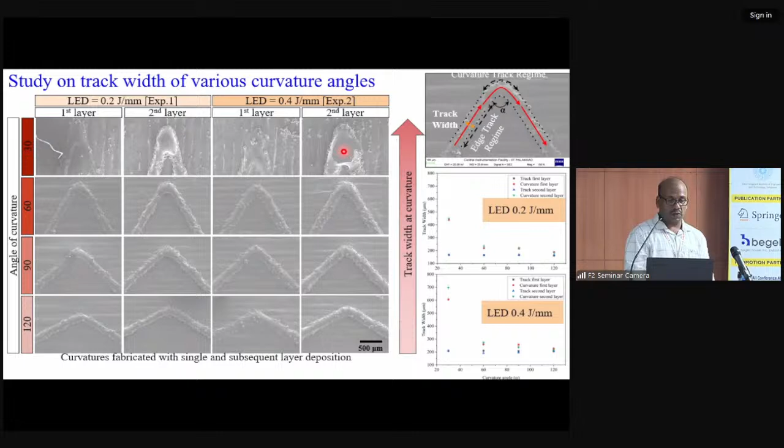So out of these different angles, we found a problem in all the angles. But the most prominent problem is with the 30-degree angle, because the turn angle is very small, so a lot of material gets deposited there. So from these two works, we are able to make a proper track with the help of linear as well as curved optimization methods.

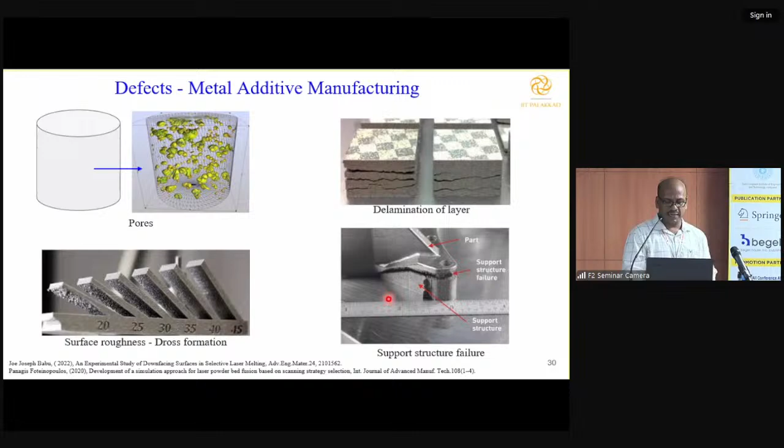Overall geometry optimization we are doing, but we also have to do another set of work - we have to know internally how the materials look like. Is it defect free? No material is defect free - there is always a defect. What we try to do is reduce the defects as much as possible. In additive manufacturing, the most prominent problems are delamination of the layer, surface roughness, and support structure failure. All these things we need to look into and work out.

So whenever you do optimization, apart from geometrical optimization, we have to optimize based on this porosity defect. Not only porosity, but it will also lead to lack of fusion defects. If you have pores, that problem causes cracks to initiate and fail very fast, so we need to consider that too. Also, whenever solidification happens, shrinkage error comes in, and shrinkage error also leads to pores - called shrinkage pores.

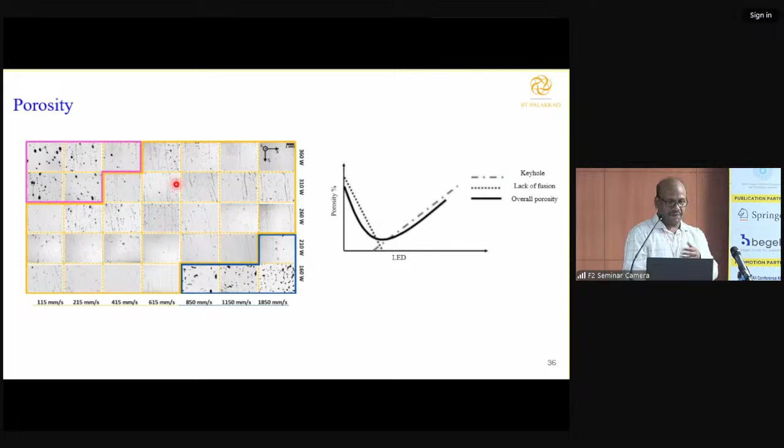Now this optimization should be done based on geometrical aspects as well as defect aspects. This is the area for a given scanning velocity and source power - this set of parameters will give a full dense product. This is process mapping development. For any process, you're supposed to work out this process mapping development - it will give a lot of insight.

Since the time is very less, I would like to conclude now. I'm just skipping these slides, I don't want to go through them.

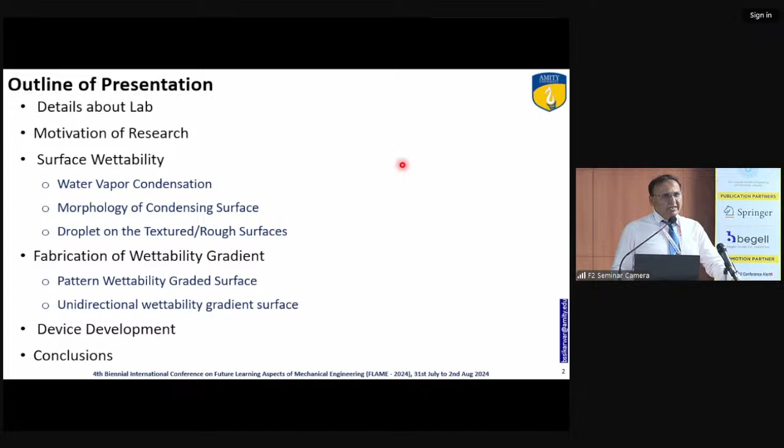So as in my topic, I'm discussing how we fabricate a surface which has a wettability gradient. This is the outline of the presentation. First I'll talk about the details of my lab - some people already visited, so they know about it. Then I'll talk about the motivation of research, then surface wettability, then the effect of surface wettability, like rate of condensation of water. Then the morphology of the condensing surface, the droplet on textured and rough surface, then the methods we use for fabrication of a wettability gradient surface. At the last there is only one slide on device development - I'm not talking too much about device development. Then finally I'll conclude my talk.

So why do we have to fabricate the wettability gradient surface? Think about it - our country is going to set up a space station in space. You know that for the survival of the space station we need water. How can we produce water if there is microgravity? In a space station we have water sources like humidity of the air, because inside the cabin there is definitely some humidity. Then we have urine, we have waste, and so many other sources of water.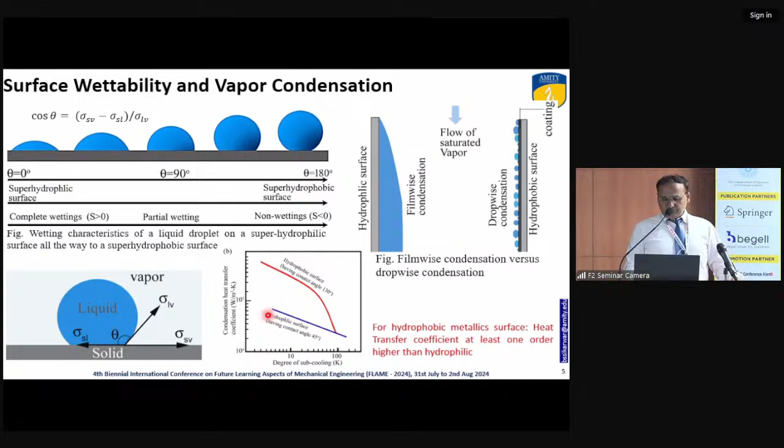So this video is not running. Yes, now it is working.

So you see, in drop-wise condensation there is initial nucleation on a surface, then the drop grows by direct condensation, then coalescence, then slide off. Clear? Because of this slide off, the drop frequently slides off the surface.

This is due to gravity. On a vertical surface, the drop slides off due to gravity, so there is an automatic refresh. That's why the heat transfer coefficient of drop-wise condensation is at least 10 times higher than film-wise condensation.

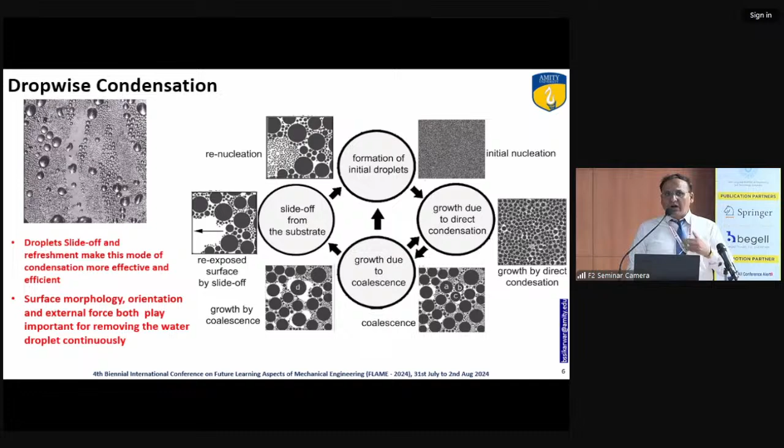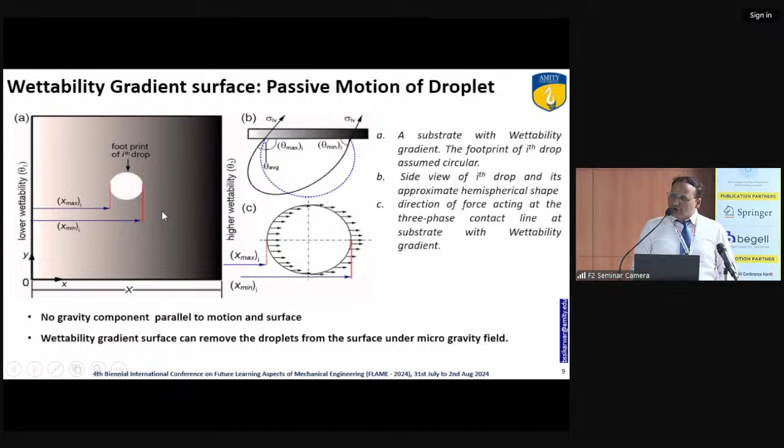Here I am giving the free body diagram where you can find out what amount of drop is sliding and what size of drop is sliding from the surface. So here we don't need gravity, since the drop is sliding by the passive action of the surface.

You can see here the schematic diagram. We have to do the wettability gradient on an aluminum surface. First we polish the aluminum surface, then do hot water treatment. Hot water treatment is nothing but putting the surface in water at 100 degrees centigrade for 2 hours. What happens is a porous oxidation film forms, and when it dries, then we mask the surface.

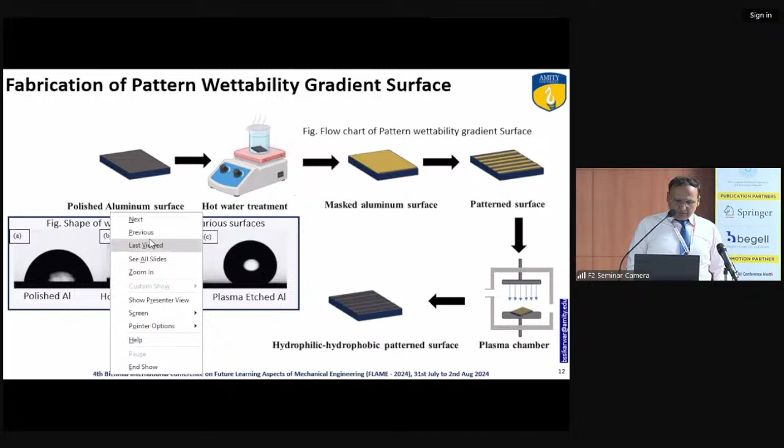The contact angle... the laser is not working. So you see here, this is the polished aluminum surface, the contact angle is close to 60 degrees. After the hot water treatment, the contact angle is 20 degrees, and for the plasma etching, the contact angle is about 140 degrees.

So you can see we did the condensation experiment. I won't explain the experiment in detail, but what you can find out is where the surface is hydrophobic there is drop formation, and on hydrophilic areas there is film formation. What happens is the drop at the interface is sucked by the wettability gradient toward the hydrophilic region, so it automatically cleans the surface for new condensation.

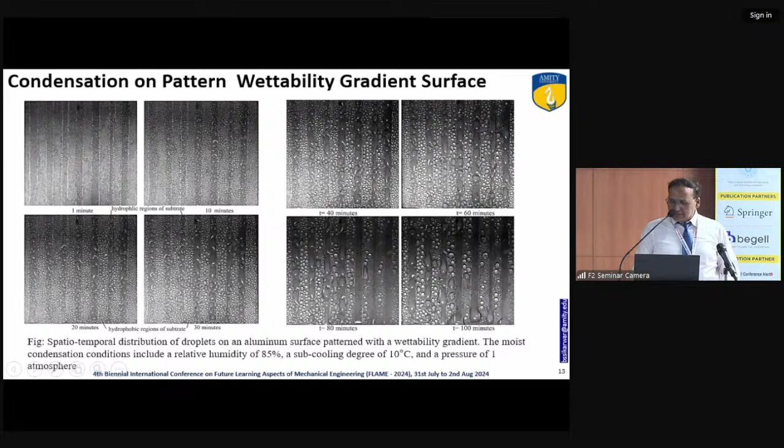I think this video gives the complete picture for you. You can see here what happens: a drop is formed at the hydrophobic surface, and it is pulled by the hydrophilic surface, then it slides, forming this kind of pattern. This type of pattern is generally what we get from the surface pattern.

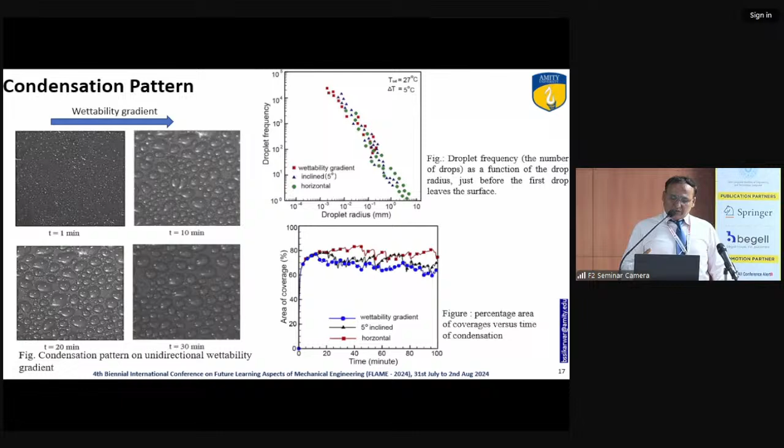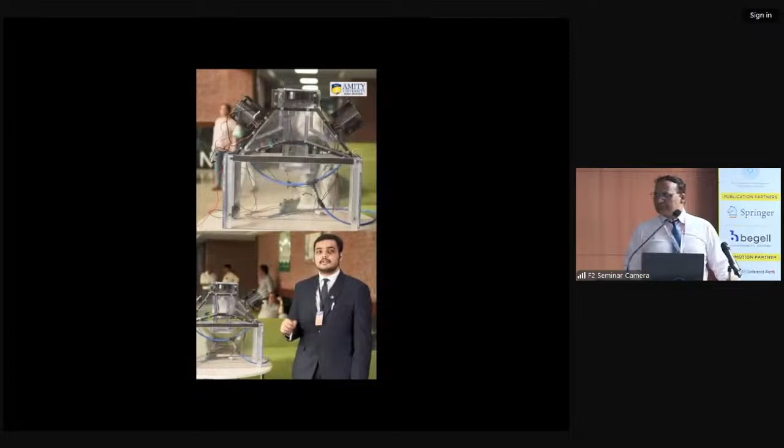This is the setup we have developed to carry out the condensation experiment. These are the cooling units, using Peltier coolings like this, and these are present over here. This is the device in development by our department, which also won Best Innovation in Technovet 2024. The device is named the Moisture Condensation Device.

This is the basis of its working. The principle is the flow of moisture through the system. The condensation chamber has an aluminum plate which is cooled down via two heat sinks, and the cooled plates allow for dehumidification of air. We start to form droplets which are collected downwards and further collected into a measuring beaker through these blue tubes. The rest of the air is then ejected outwards through the exhaust fan.

The device is very pragmatic in nature, essentially made for solving the water crisis present in India particularly. By harvesting water from the air, we are increasing our resources. We are planning to set up this device, present over here.

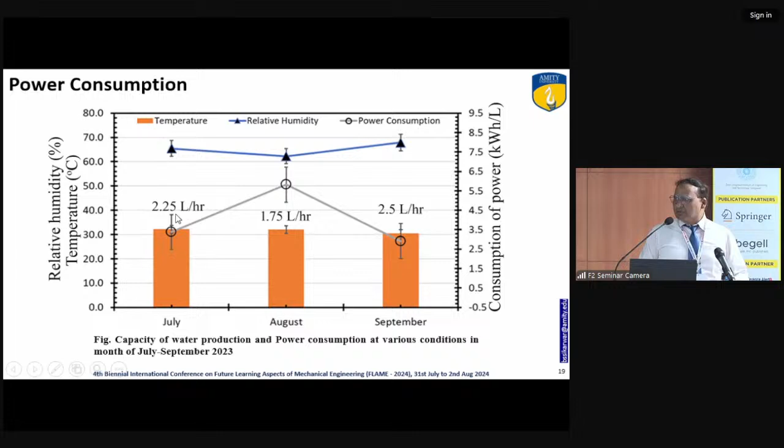We are planning to set up this device in a space station where we are trying to produce water. This is all the performance data of the device across this variability gradient. You can see that in July, August, September the relative humidity and temperature are different, and accordingly the power consumption and water generation vary: 2.5 liter per hour, 1.7 liter per hour, 2.2 liter per hour, under different conditions.

So I'm concluding here my talk. This study is fabricated for a pattern of unidirectional wettability gradient as well as patterned surfaces. Wettability gradient enhances condensation on engineered surfaces by facilitating continuous condensate removal on hydrophobic surfaces. Droplet velocity depends on the surface wettability gradient, allowing micro droplets to slide towards the more hydrophilic surface, and the wettability gradient results in a higher overall heat transfer coefficient compared to a non-graded surface.

Durability and scalability remain a concern. We are working on this area because we generally found that the surface is not durable, and this research is ongoing. This continuous transfer and removal process increases the overall condensation rate, making it suitable for space applications.

These are our collaborators: Professor Mulidhar from Indian Institute of Technology Kanpur, and Dr. Mukesh Ranjan from Institute of Plasma Research, Gandhinagar, who is helping us with fabricating the plasma and related work. Dr. Sumant Upadhyay is a faculty member in the nanotechnology department; his wife is a chemist, so he's helping us with some chemical processes. We also acknowledge and thank BRNS and SERB for providing the funding to carry out this work.

For this work, Apurva made the video. Ismail is here, he is a PhD scholar. And Subham Dhawan is a graduate student, he is doing some simulation work. Thank you very much.

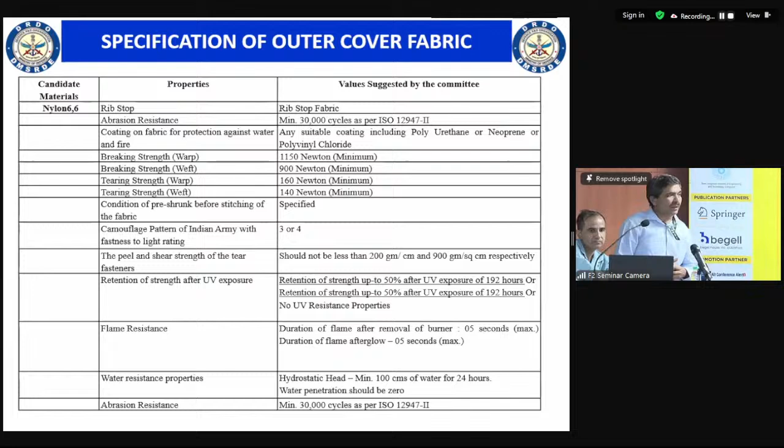So the outer carrier, which is the housing of the hard armor panel, also plays an important role, and these are some of the important things that need to be addressed while using the material. And these are some properties of the fabric.

So basically, let's see what are the important properties for the armor grade ceramic to be used as a front facing. The density should be less. It should have high stiffness and modulus. Hardness is extremely important, because as I told at the start, we now have hard steel core bullets, so the front facing has to be hard. Hardness of the ceramic plays a very important role, and the ceramic should also have high fracture strength.

Fracture toughness is also very important, because if the fracture toughness is low, the formation of cracks upon hit of the bullet will be more, and that panel will not be able to withstand multiple hits. So we should have high fracture toughness for the ceramic.

Compressive strength plays a very important role, because what we have observed across different grades of ceramic - in fact we have estimated the dynamic compressive strength using the Split-Hopkinson pressure bar - is that if the dynamic compressive strength is lower than 2000 MPa, that ceramic will not perform well.

And when we are doing the simulation, we are also estimating one property called HEL, which is the Hugoniot Elastic Limit. For boron carbide, this elastic limit is 18 GPa. So when doing the finite element simulation, this property plays a very important role in estimating whether the ceramic will be able to stop the bullet or not.

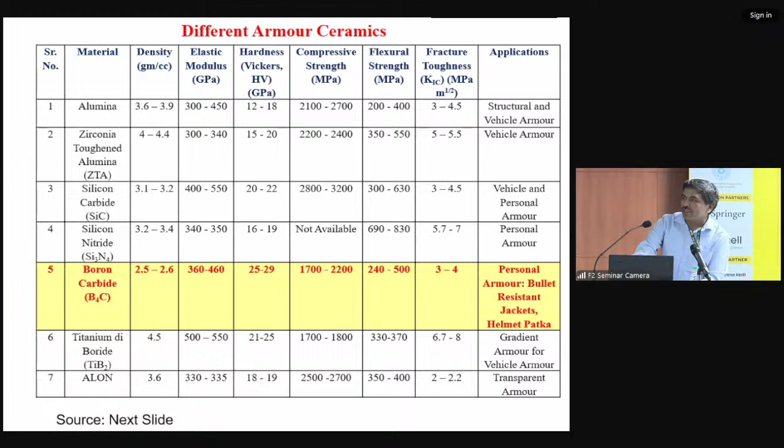These are some more detailing things, the different properties which have been explained over here, so all the properties are there. The fifth one is boron carbide, which is the best material for making bulletproof jackets. These are some of the processing details for making boron carbide.

We start with the powder, and then we do the sintering. There are three grades of boron carbide. The previous one is hot press boron carbide, and this is reaction bonded boron carbide. In the reaction bonded boron carbide, we first make the slurry.

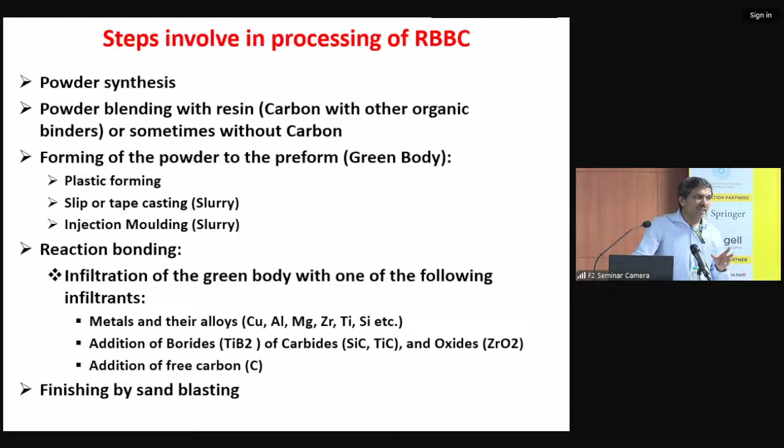The slurry has an optimum combination of 14 types of ingredients, and that slurry is converted into the green body by injection molding. Then that green body is sintered at a temperature range of 1600 degrees centigrade to make the product.

High strain rate property means the dynamic compressive strength, tested using the split Hopkinson pressure bar, because ceramic is not easy to handle. Doing this test for different grades of ceramic requires a lot of expertise for specimen preparation and for testing, because a lot of sample goes to waste.

This is a special technique, and we use the facility at IIT Kanpur for this testing, in fact for BIS certification. There is a conditioning protocol testing as per BIS, where all hard armor panels are exposed to a specified temperature of 65 degrees centigrade at 80% RH, with a holding time of 10 days. After the 10 days, the hard armor panel is exposed to cyclic temperature, from a lowest of minus 15 up to 90 degrees centigrade.

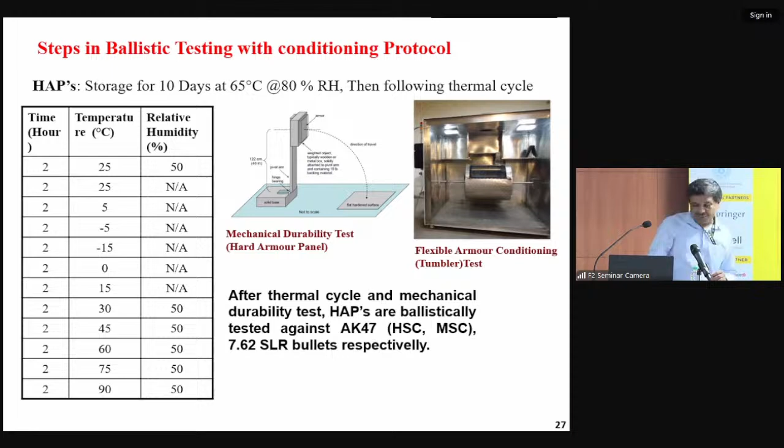These are the actual testing of the bulletproof jacket. There is one DRDO lab at Chandigarh, which is TBRL. We are doing all the testing of the bulletproof jacket and helmet at TBRL.